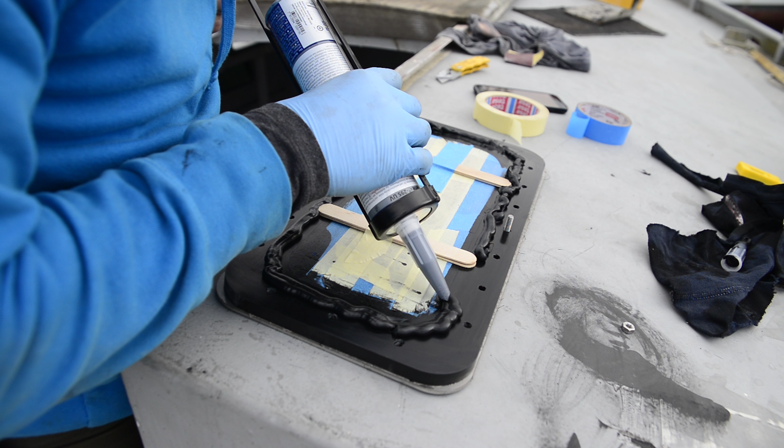In this week's episode, I make a mess with some sealant. I get some ice in the boat. It's freezing. And I show you the main saloon.

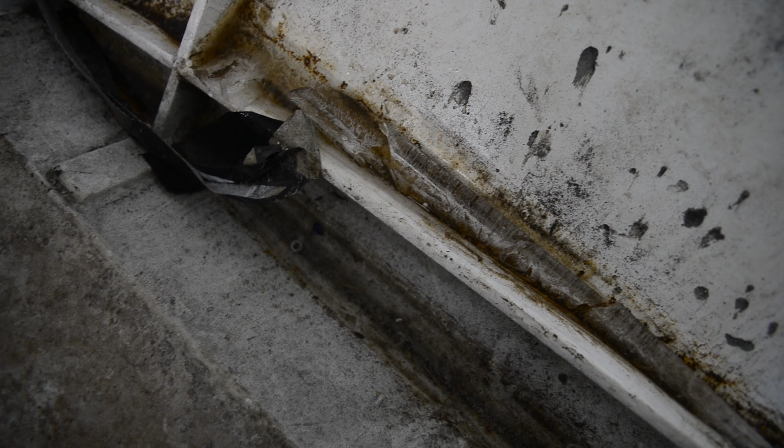This is the main saloon. So I've done exactly what I did on the hatch, and I've sanded down the acrylic and put on Sika primer. But a little trick I'm going to use is I've taped these tongue depressors down against the plastic.

So that when I put the sealant on and push it against the window frame, I'll have a spacing. It's very important to have a spacing when you've got sealant, because if you squeeze the glass too much against the frame, it'll squeeze all the sealant out. So it's very important to have that gap. Then when the sealant is completely dry, you can tighten it up a little bit more, and it gives it that extra seal.

So now that I've got the lollipops in place, I'll put loads of Sikaflex on that, which goes absolutely everywhere. Then I'll bolt it in, and that'll be that window.

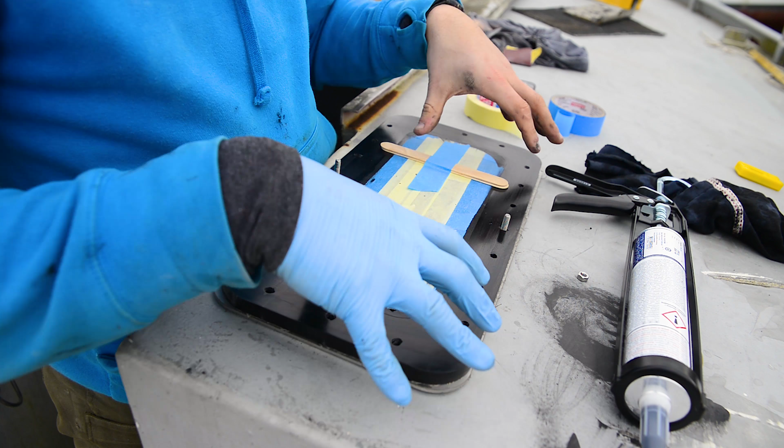I've got to clean off the edges. I've taped around where I want the sealant to stay away from. It's very important when you're doing anything with sealant or paint to tape anything you don't want the sealant to touch, because it will go everywhere you don't want it to go. So make sure you can only see what you're going to put stuff on.

Full disclosure, I've done two of these today already, so this is the third one, so hopefully I'll be better at this one than I've been with the other two. I didn't want to do one, film it, and make an absolute wreck of it. So anyway.

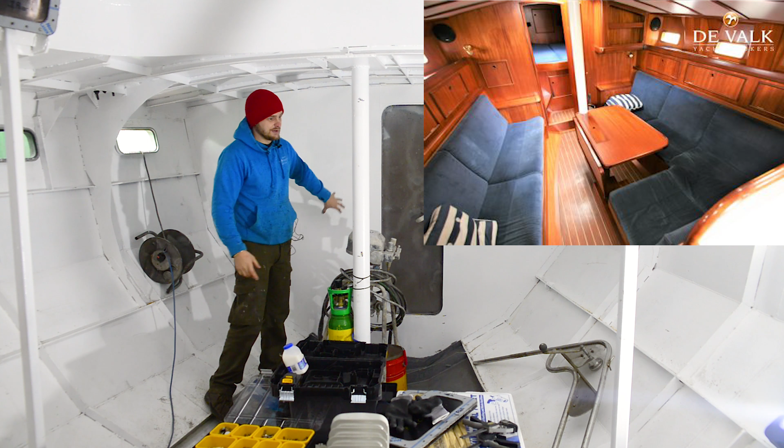That'll also be sea berths, and probably a stove mounted on the wall, like a wood-burning stove. This bulkhead is actually a watertight bulkhead, with a seal on the door as well, so if you do have a hull breach in the forward cabin, you can close the doors and have a watertight cabin. So we'll just head into the forepeak and I'll show you that.

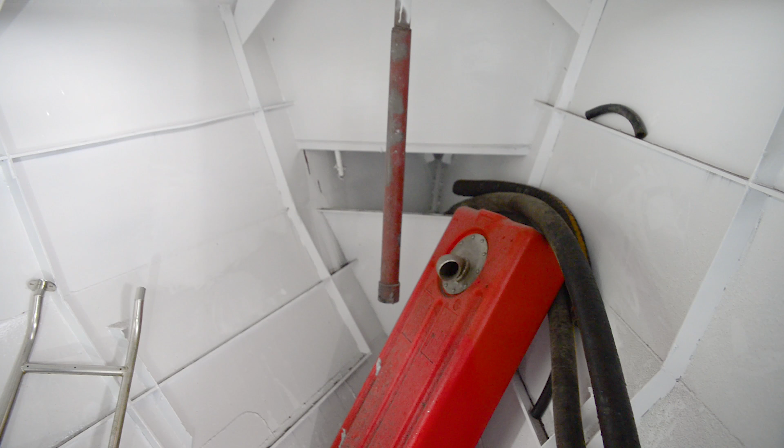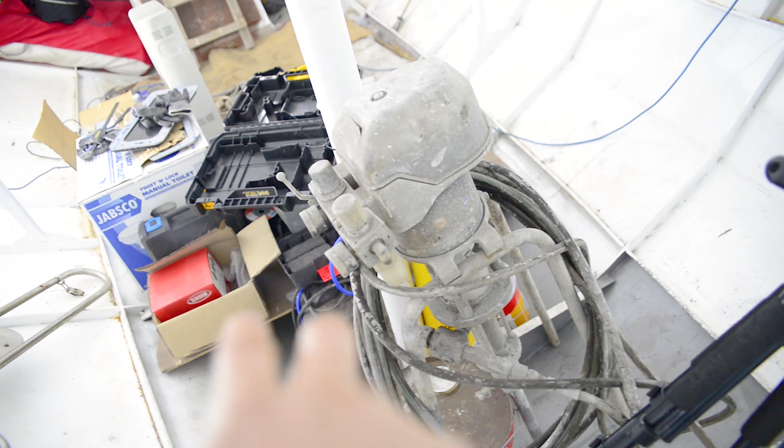So this is the forward cabin, and the plan is that's where the chain locker is, the chain comes down into the chain locker. I'm going to build a fiberglass chain locker that will drain through a pipe out through the bilge and into the black water tank, which I still haven't decided, but it might be there, or it might be behind the diesel engine.

So that's my diesel tank actually, I'm going to use a plastic diesel tank. But anyway, it's going to be a double berth in here, a little bit of floor space, maybe this much, and then the berth going back. Luckily I'm short, so is Neve, so it shouldn't be too bad.

So each of these berths are actually going to be about 6'5" long, with storage in behind and underneath. There's a water tank here and a black water tank here, but I'll probably just not use that black water tank.

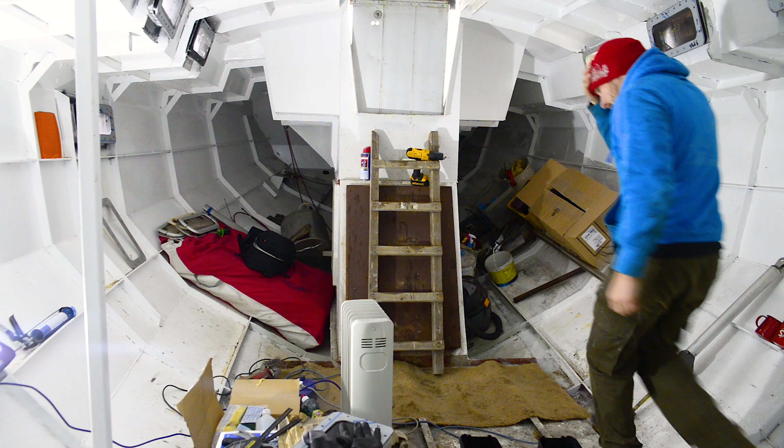So what else? Then we'll move into the galley. So obviously this is the companionway, and coming down from the companionway I'll have a galley to the port side, and on the starboard side I'll have my chart table.

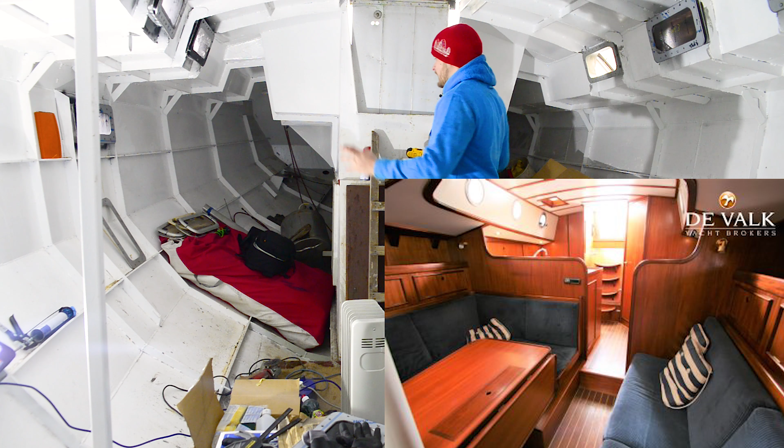There's quite a lot on the original designs. There was actually a double berth way back, because the cockpit wasn't quite as big. But the cockpit's been lengthened, so there's no more berth in the back.

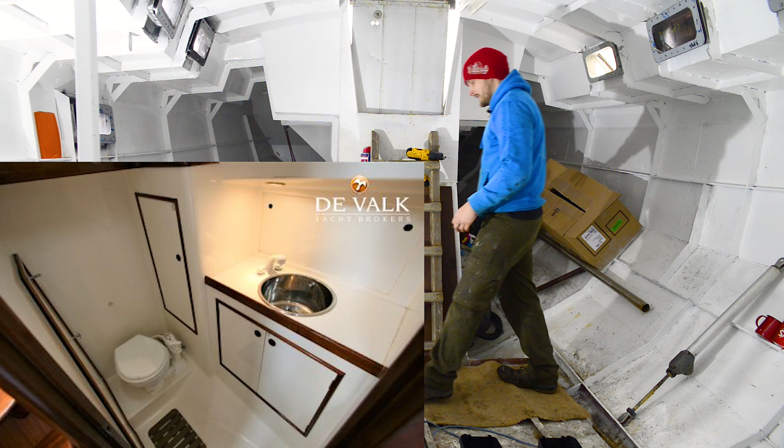So on either side of the companionway, I'll have some bulkheads that come out and over, and they'll close off the heads, which will be to starboard, and I'll have a double berth on the port side. So that layout should afford me a nice, cozy boat, but still use the space that's there.

At the end of the video, I'm going to show you the CAD designs I've been working on, because I want to 3D model the boat, build the interior in CAD, and then have the main components CNC cut, so I can bring it all in and just bolt it together more or less. There's also been a few questions about insulation.

A steel boat condenses quite badly, and even today I've got a small heater in here and it's getting quite a lot of condensation. So I'll have 2 inches of spray foam insulation that'll go onto the steel, which will seal up the steel, keep the heat in when it's cold outside, and keep the cool in when it's warm outside.

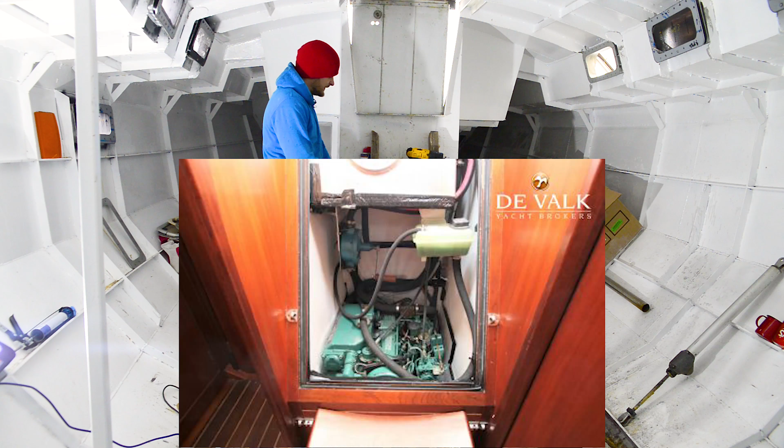So in here we have the engine room, which we've seen in a previous video along with the engine. Behind the engine room I'll have a black water tank probably, plus my hot water systems and everything behind there. Behind the heads I'll have a wet storage locker that'll probably drain into the black water tank, and my steering system is behind there as well.

I want to keep it as open as I can so I can access the steering if the cables fail. There's a tiller head too, for a self-steering vane, but I'm planning on using wheel steering, and if that fails I'll have my tiller as backup. When building a boat for long distance, you have to build everything with redundancy so that if something fails, you have a backup.

I can't do a tour of the deck today because it's absolutely bucketing and horrible outside. But in the next couple of weeks when the sun's shining, I'll do a bit of a deck tour and show you my plans for the deck hardware and stuff like that.

So soon I'll have my rigging back as well. I got my rigging quote - it was a bit more than I had budgeted, but that's okay because I got extra stuff done that I wasn't planning on. The backstay is kind of bleeding out of the swage terminals, so I said while I'm at it, I'll just do the entire rig. Now I have a brand new rig that can go anywhere in the world, so it's a little more expensive, but it had to be done.

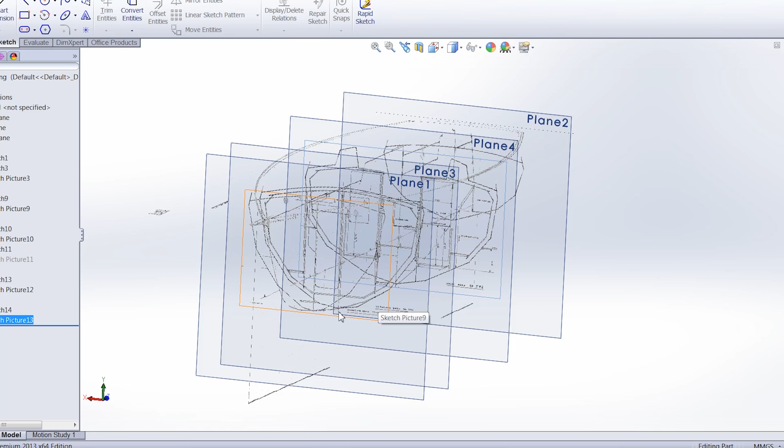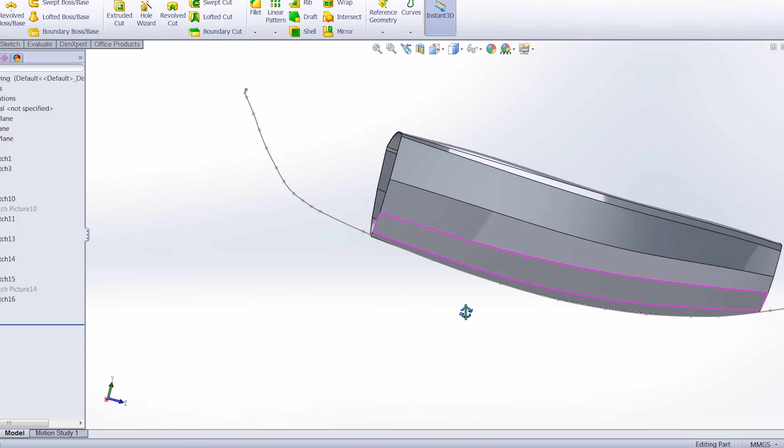So basically what I did was take the designs for the boat from the designer, break all the sections on the plans into JPEGs, set those JPEGs into SolidWorks, and loft my hull shape from that. I didn't have much success though - the hull shape was kind of twisted and a bit funny, so I dropped that idea and moved on to something else.

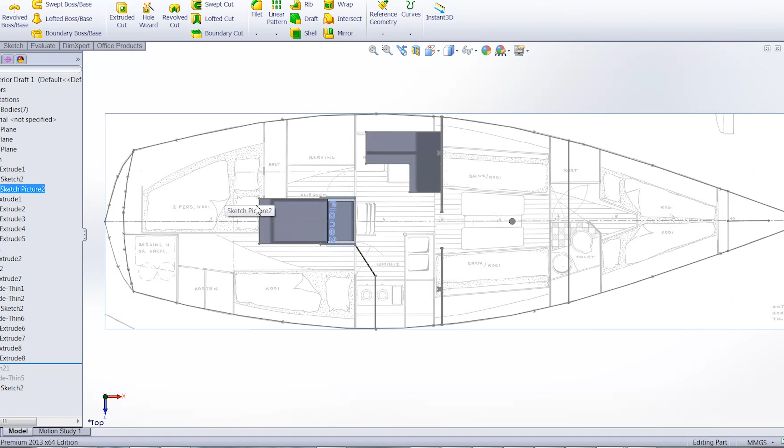Instead I took the floor layout of the boat and lofted all of my solid main structures - the bulkhead, the compression posts, the engine room - and took my measurements from there to design the interior, since the original plans aren't what I want to use. Hopefully at the end of that I'll have a really good idea of the dimensions, how the boat's going to look, and how I'm going to build it. So that's the plan, and that's what I'm hoping to achieve.

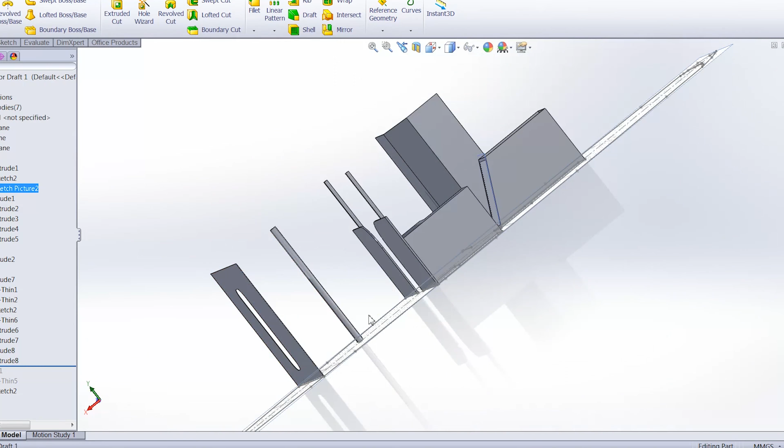Before I finish up for the day, I want to clear something up with a couple of my longer term subscribers. If you've been watching from the start, you'll know I was restoring a 23-foot Achilles called Frantic, and that's where the name Frantic Sailing Adventures came from.

That boat, I still have it, but obviously this project has taken over, and I'll explain why. That boat now, I want somebody to take it on who's going to finish it and basically take me sailing. So if a young person who's interested in sailing and also interested in finishing off a boat to go sailing, then that's the right project for them. So if you're in the south of Ireland and looking for a project, get on to me, and if I feel you're really properly interested, you can have it, as long as you take me sailing.

The reason I dropped that project and moved on to this one is pretty simple. I did an Atlantic crossing with two of my best friends, and I've popped their channel up here. We crossed over in December on his 36-foot steel Van de Stadt that was actually built in this yard.

And when I got to the other side, I realized I want something bigger. I want to be able to do what my mates are doing, and I want to be able to go cruising too. I couldn't have done that in the 23-footer. Well, I could have, but on my own, not with anybody else. It's a very small boat, there's no headroom. You're going to need a bigger boat.